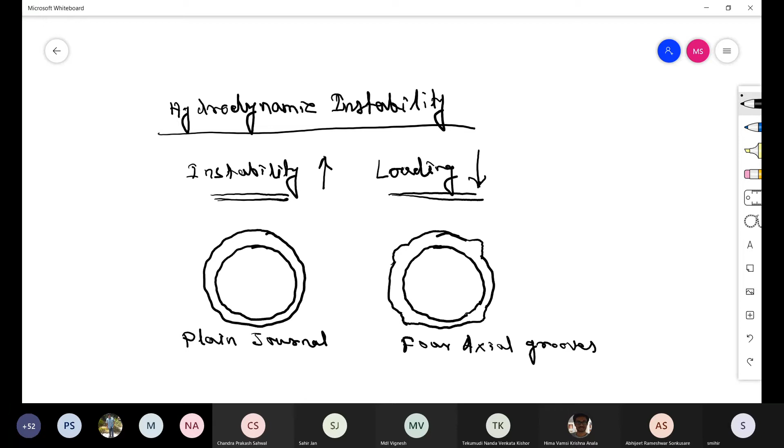This is your plain journal bearing. This is 4 axial grooves. These grooves are in axial direction. Like this is the bearing. So these grooves are in the axial direction. This is the groove. So by that you can actually feed oil and load the bearing.

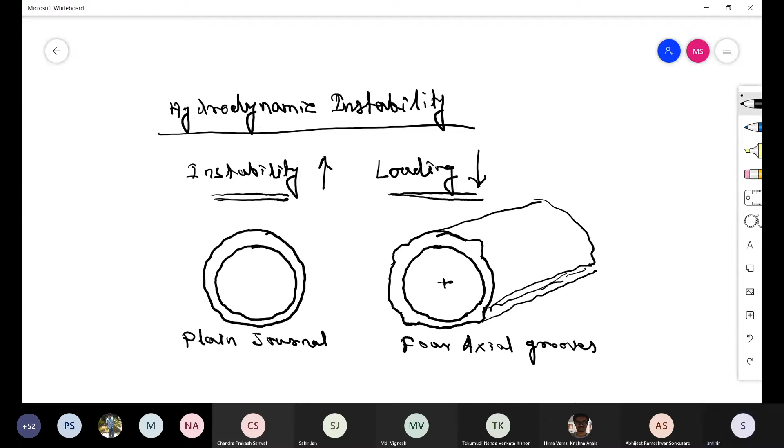So your ultimate aim is to load this journal. Also you can have configuration like elliptical bearing. In this elliptical bearing, as you have a converging section here, you can see on the top, there will be pressure development on the top, so this bearing will be loaded. This is called elliptical configuration.

Similarly, offset half bearings. So offset half, offsets are provided here, then you put your journal. By this also you can load the journal. So your ultimate aim is to load the journal.

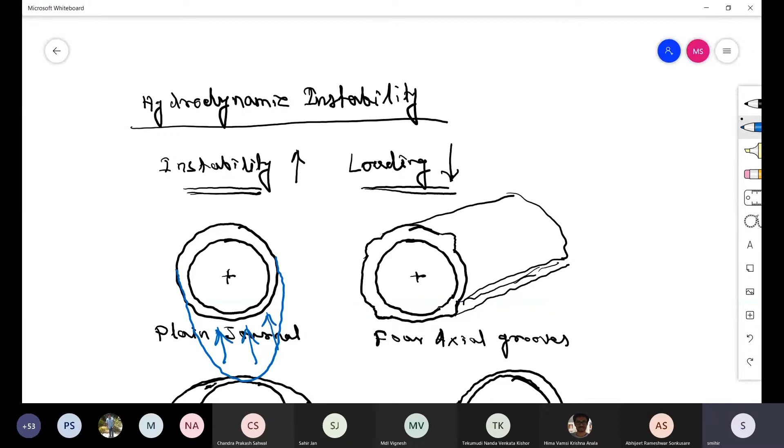In normal journal bearing, your pressure distribution is something like this. This is your pressure distribution. We don't want to get this pressure distribution. So you load it so that this pressure will be distributed.

Now the best configuration used widely in industries for journal bearing is tilting pad journal bearing. What is that? You have, this is the journal. This is called tilting pad journal bearing. You see, there are 4 pads here. The number of pads depends on the size of the bearing.

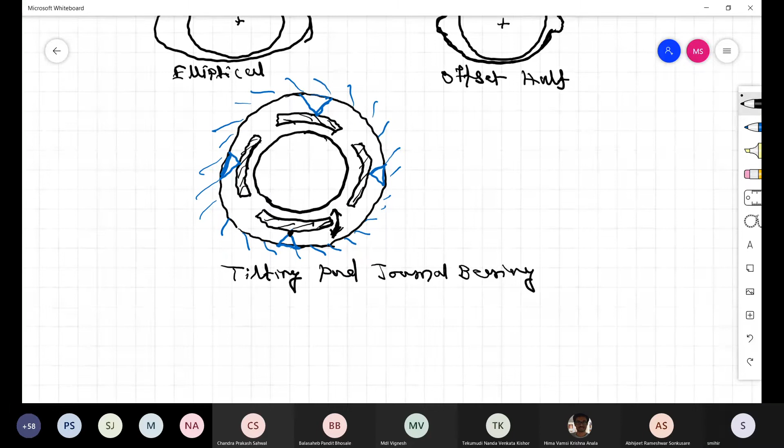Cause of hydrodynamic instability.

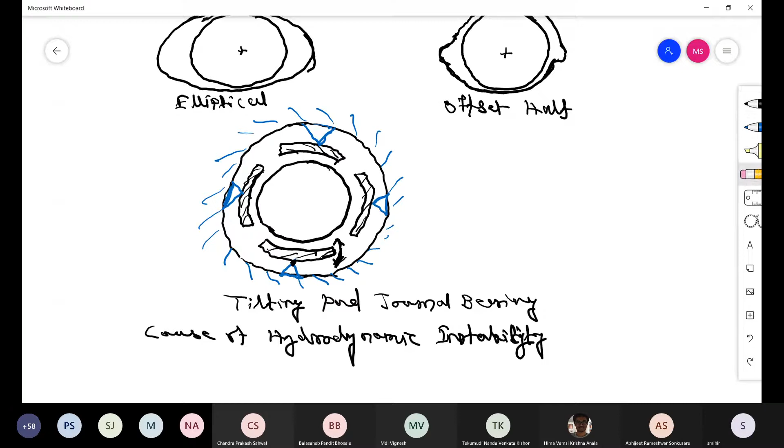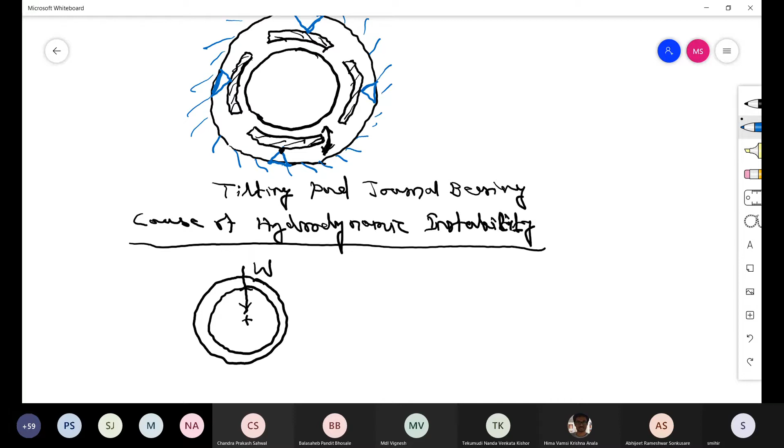Now, in a stable configuration, when the bearing operates, it operates like this. This is journal center. Now the external load is acting, that is W. So this external load, as I told you, this is balanced by the fluid pressure that we know now. This is balanced by the fluid pressure P. Because of P, you get the force F. So F stands for fluid force. So F equal to W. So it is balanced.

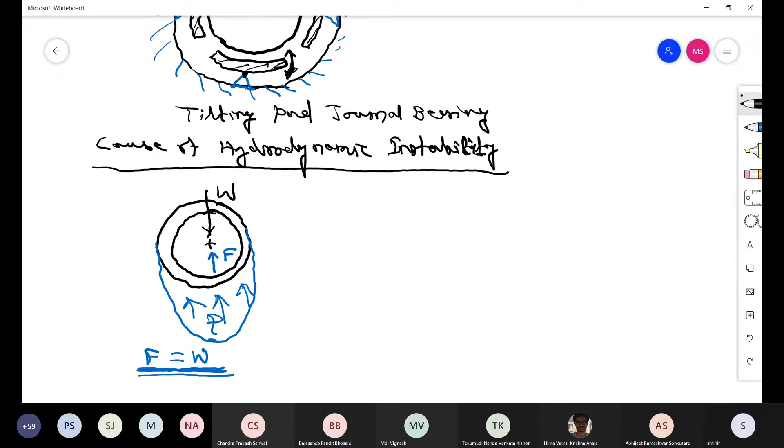Now what happens? You know, in operating speed, when journal rotates, then in ideal condition F equal to W, but all systems are expected to get little change in load. So this is your bearing and this is your journal.

So this one earlier was W, and this one was F. Now if you see, the bearing center is somewhere here. This is bearing center, this is journal center. Now F equal to W, it is balanced.

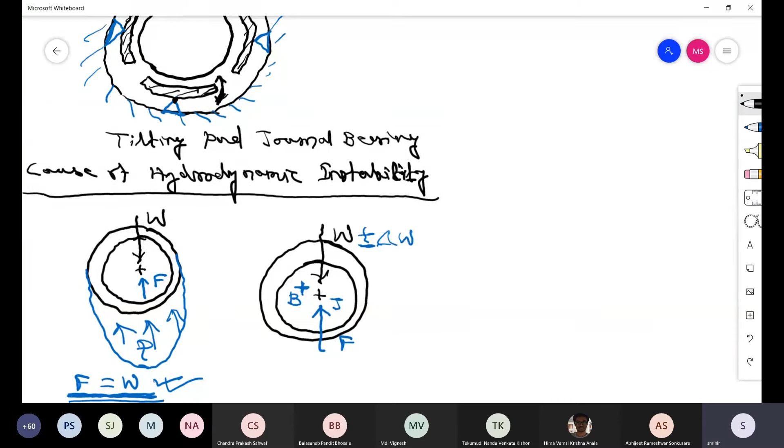Now because of some reason it vibrates, or this load W goes plus or minus delta W. Load may change, so load is not exactly W, it may be slightly plus or minus delta W. Imagine that at some point of time instantly now there is the load, let's say minus delta W, some amount.

Then what will happen? This F will be greater than W. W is now minus delta W, so it is greater than this at some point of time, because this force F is the fluid pressure due to fluid pressure.

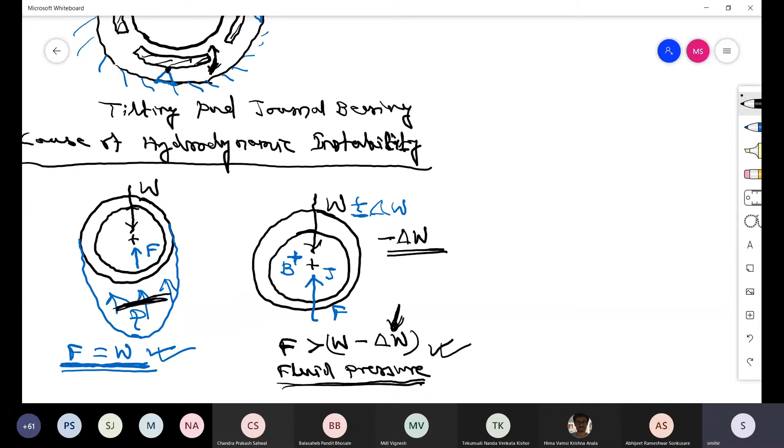So instantly you can change this delta W, but this fluid pressure takes some time to change. Now your load W reduces, that means ultimately this pressure will reduce to balance it. But at that instant the pressure is same P and it is same F. Now that means F is greater than W minus delta W.

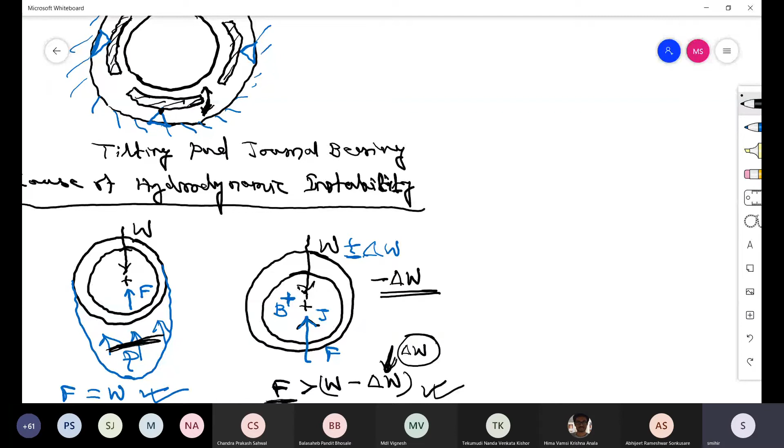So what will happen in that case? In that case, this force will push the journal upward. Now in the next instant, this delta W may change again. So in that case, this F is never equal to W. F is always trying to adjust W, but it takes some time because of fluid pressure.

So fluid pressure cannot change instantly. So ultimately what will happen? So once it starts, this is the journal center. So journal center will be disturbed and it will make a circle around or ellipse around bearing center.

So forget about the rotation of journal. This is the rotation of journal, which is omega. Journal is rotating with a speed of omega, this way. With a speed of omega it is rotating, and now the journal center is making a move around bearing center.

See this dotted line, this red. So that is also having some other speed. This is called omega p. So there are two speeds now. One is omega, which is the speed, our desired speed, at what speed we are running our turbine, generator, or gear assembly, or whatever machinery. That is the speed of journal.

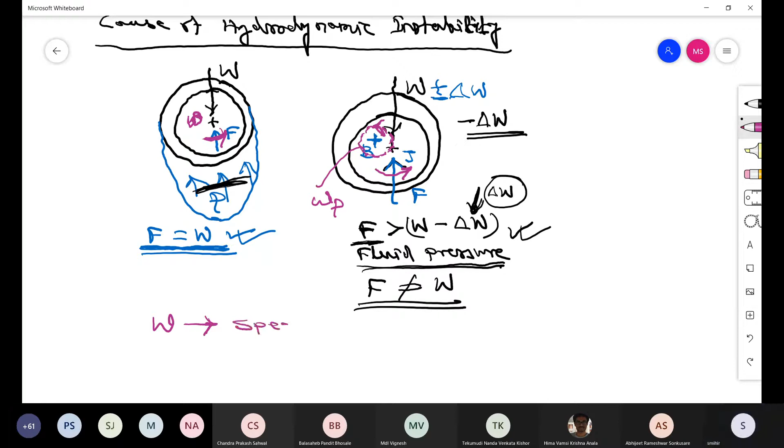So omega p is the speed of journal center about bearing center. Any doubt?

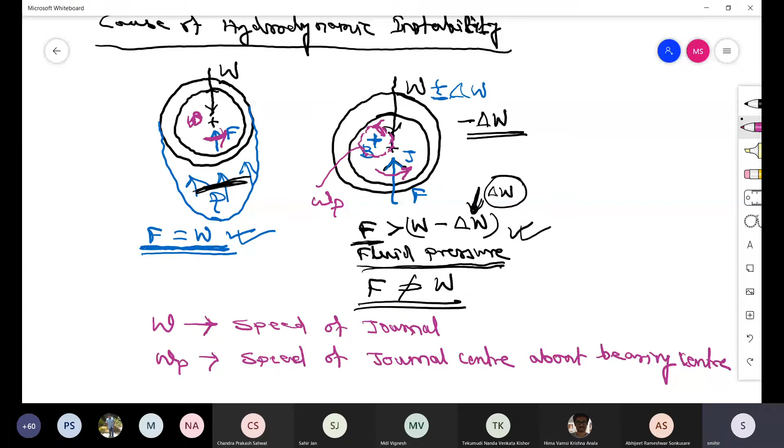Okay, so this omega, this fellow omega p, it is not in your control. So therefore you cannot actually remove it. So this is called whirling. Whirl, this is whirl speed. This is called whirling, this is known as whirling of the journal.

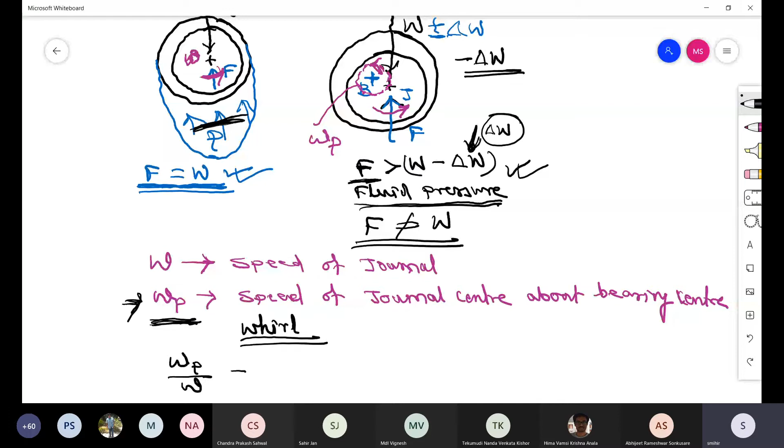So journal center will rotate about bearing center. So this whirling for hydrodynamic journal bearing, just remember this is omega P or omega P by omega equal to, or approximately equal to, 1 by 2, half. We'll see how it is half. So omega P by omega equal to half. So this is called half whirl mechanism.

Half whirl mechanism or instability. So imagine you run your journal with a speed of, let's say, 1000 rpm or 2000 rpm or 3000 rpm.

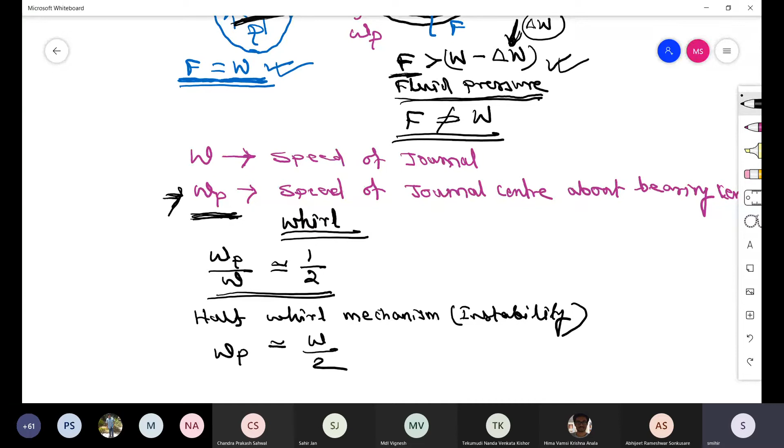Omega P will always exist. Omega P will be always there, and it will run at what speed? It will run at omega by 2, half of the speed of the journal. That is called spinning speed. Even this one you can call spinning speed of journal.

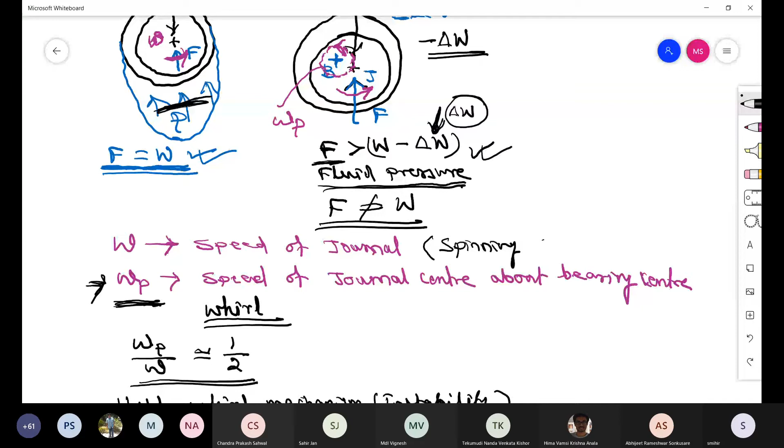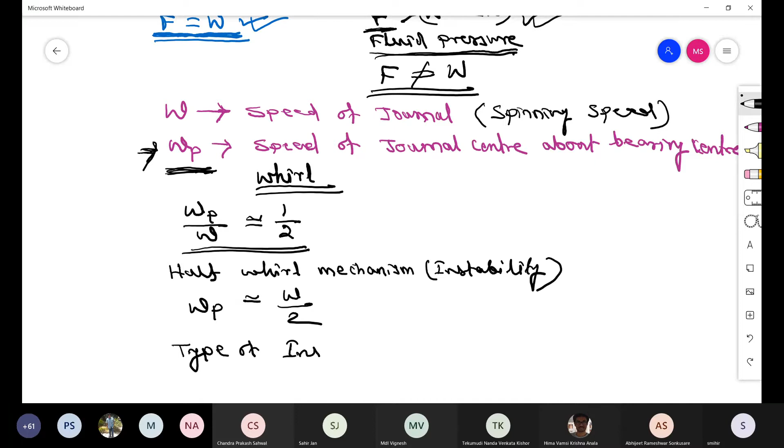So theoretically it is half of the speed. So now, type of instability. So first one is subsynchronous.

Subsynchronous. Yes, please. Sir, this ratio will remain same irrespective of the unbalanced load? Yeah, yes, it doesn't matter.

But this speed is not going to change. This omega P by omega ratio will remain same, whatever speed you take. And so when the pressure will actually balance the offset load, try to imagine - see, things are vibrating.

You know, like this is the ideal case, pen and paper, we are saying this is W, right? But when the things are operating in actual industry, this W never remains same. It always plus or minus delta W. Okay sir, okay, for that instant it will try to balance. When it goes to balance it, then at that point delta W will change to another value.

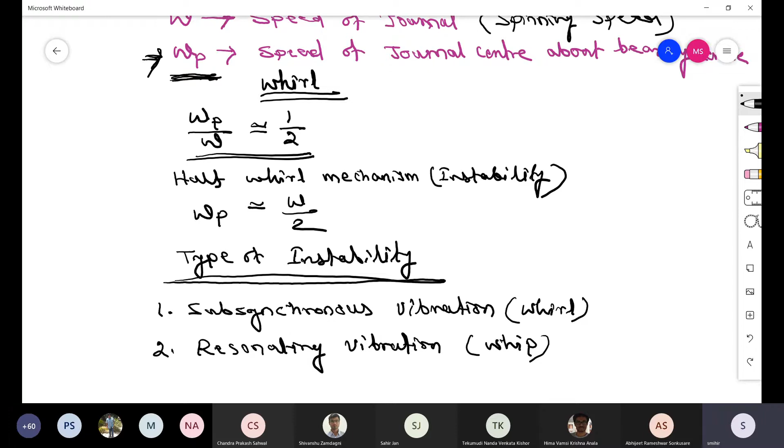See, in your vibration study, what do you do? mx double dot plus cx dot plus kx equal to f, right? How do you solve this equation? Can anyone tell me how you solve this equation?

So we find the homogeneous part, the general solution and particular solution, and add it. This way also you do: you assume f equal to capital F e to the power i omega t, right? And X you assume actually capital X e to the power i omega t. Is that correct? Yes, sir. Okay, so now this is called synchronous.

Can anyone tell me why synchronous? They are in phase, so they will have the same frequency. They are having the same vibrating frequency. You are assuming — see, try to understand, it is not that actually happening. You are assuming the vibration is synchronous, first of all, in your mind.

And then you are putting a forcing function. This forcing function you are putting with omega, and the same you are putting for response. So when response and the forcing — input and output — input is your forcing function, output is your response, now both are having the same frequency. So then it is called synchronous vibration.

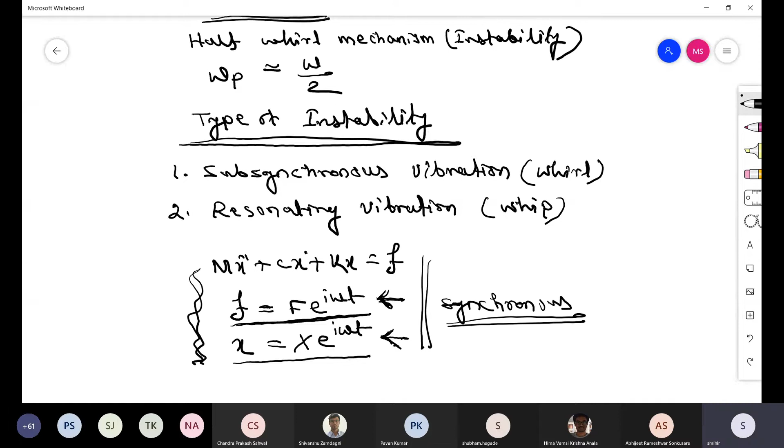Now coming here, I mentioned two things: one is subsynchronous, one is resonating. Now in the subsynchronous, that is actually omega p.

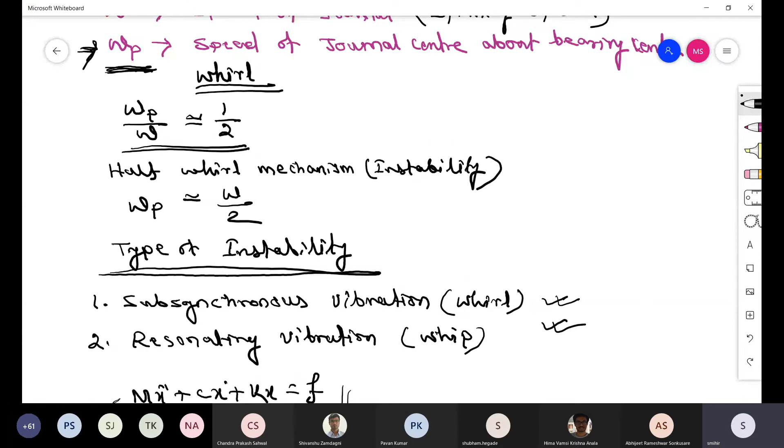See, in our system, in the journal bearing, who is actually giving this vibration? This omega p. If omega p is not there, imagine — the journal will not be disturbed. It will remain the same at that point and it will just rotate. So there will be no vibration at all. If you imagine there is no omega p, or no amplitude involved with omega p, then there is no vibration at all for the journal bearing.

The journal will remain the same at that point, it will just go on rotating. So rotating will not give you any vibration here. But because of omega p, the journal is vibrating — journal is going upward this way. So ultimately it will fail when the amplitude of this omega p becomes very high.

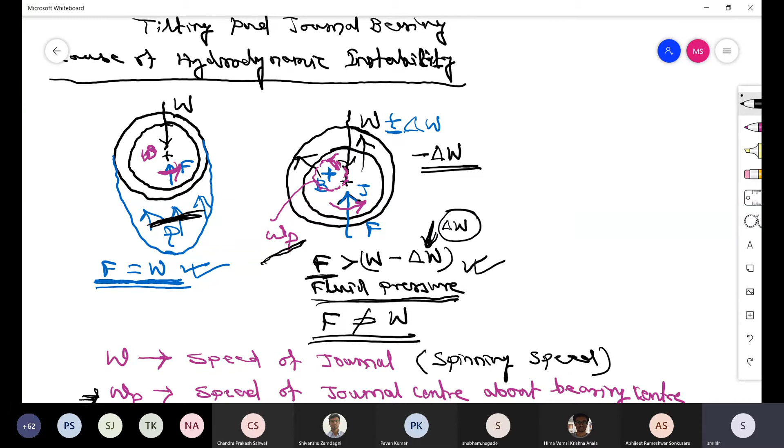At that point, what will happen? This journal will touch the bearing surface. If the journal touches the bearing surface, then the system will fail — it will rub and the system will fail. So now this omega p, as you can see here, for our case, we told that omega p is half the whirl mechanism, which is half of the speed of the journal.

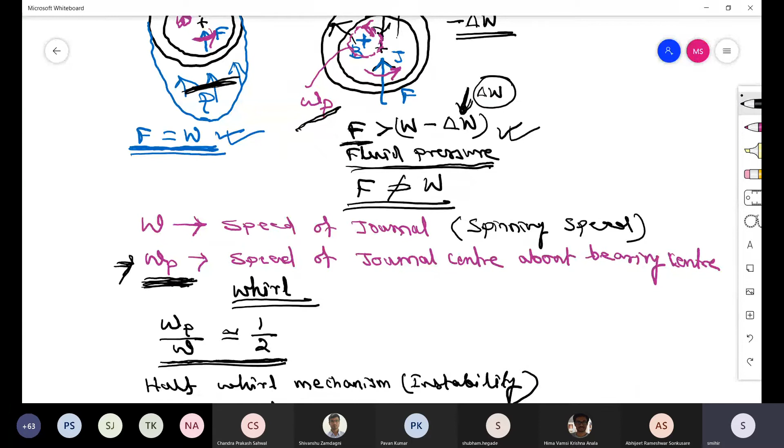Okay, so therefore it is called subsynchronous vibration. Now what about resonating vibration? Your friend was asking — resonating vibration. Yes, they both are equal, I guess.

Yeah, when the vibration — see, you go on increasing this omega. The system will be having some natural frequencies: omega 1, omega 2, omega 3. When it matches this omega 1, then the system may fail. So that is your resonating vibration.

But in our rotor-dynamic case, things are completely different. We'll see now the case. Okay, let me delete it, then we can move ahead.

Okay, let me draw. So this side we will draw whirling speed, whirl speed, which is omega p. Now this side will go for speed of journal, omega.

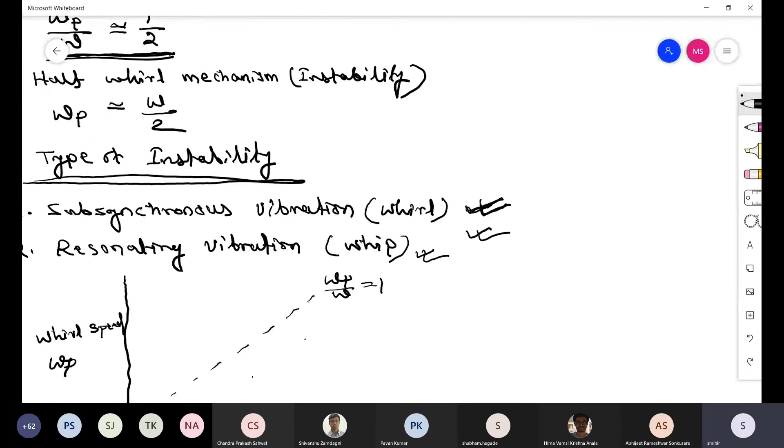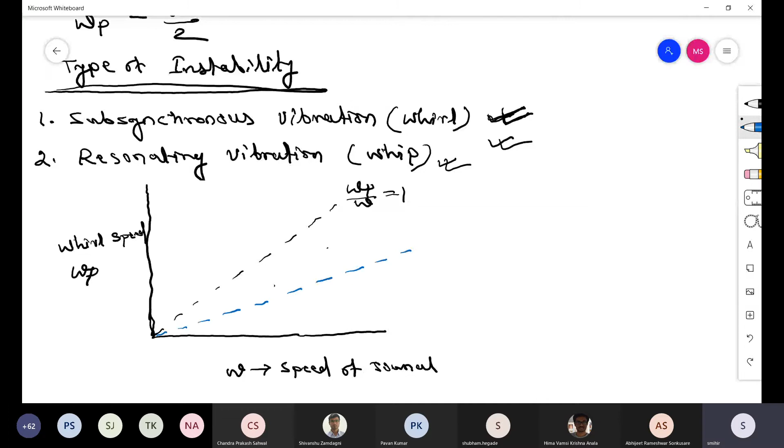This will follow this line. This is omega p by omega equal to half.

Now in this line, let us plot the vibration. If at all there is vibration, so in this line, let us first mark that a system will be having natural frequencies. Let's say our first natural frequency is here, omega 1. Second natural frequency is here, omega 2. Third natural frequency is here, omega 3. These are omega 1, omega 2, omega 3, natural frequencies.

Now you go on increasing speed of the journal. So when you increase your speed, now if you see omega p has to be half. So vibration will come as per omega p. Depending on omega p, you will get vibration response. So it will vibrate like this as you increase the speed. So this vibration amplitude is like this.

This is almost stable. Now what will happen at omega 1 when we increase the speed? Can anyone tell me? So there should be 2 omega 1, right? Like at 2 omega 1. Yes, very good. So this is omega 1 value.

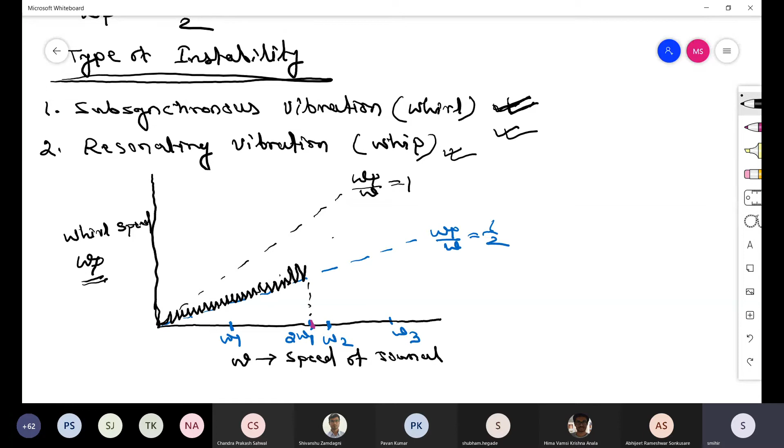Now you go on increasing, the vibration response will be very small. Now go on increasing, vibration response will be small and slowly it will increase, and at omega 1, twice of omega 1, here at this point, this vibration response will be very high. Clear? Because at this point what is happening, you are actually touching at this point. If you take it here, you are touching actually omega 1.

So when your system reaches a speed of 2 omega 1, or your journal, system means your journal is rotating, when your journal reaches a speed of 2 omega 1, then system will vibrate with a very high response and system will fail.

So you do one thing, again you increase the speed beyond 2 omega 1. So what do you expect if I increase the speed beyond 2 omega 1? So vibration will settle down.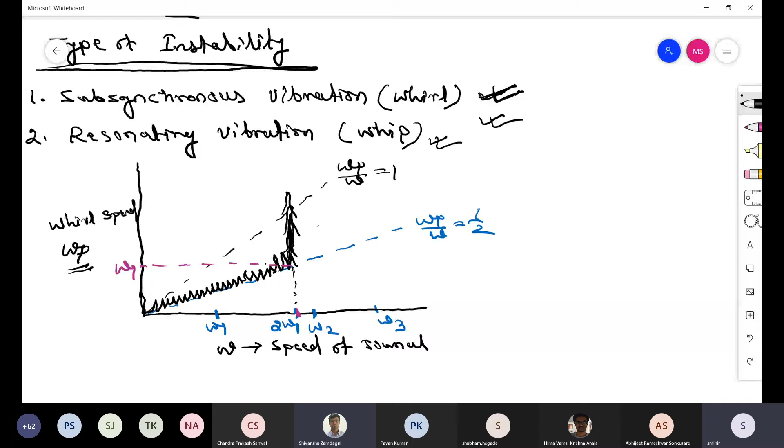No, it is not the case for journal bearing. It is interesting in case of journal bearing. Try to understand that up to 2 omega 1, when omega p reaches, omega p is equal to omega 1. That means omega equal to 2 omega 1. At this point you will get this vibration.

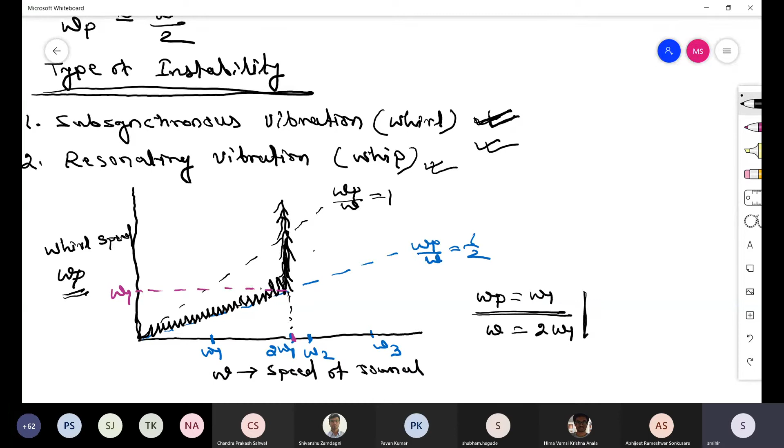This is called your second type. Now the vibration from here to here, this is called your subsynchronous vibration. Clear? Now from here to here, this is called resonating vibration. Here to here means this, at this point only. This is called resonating vibration.

Now you increase the speed further beyond this point. So but your omega p will stick to omega 1. It will no more follow this, no more follow half. So that means if you are increasing your speed, let us say beyond 2 omega 1, but omega p will remain always with omega 1. Okay, so therefore this is called resonating vibration.

That means you have no choice of increasing the speed further or beyond 2 omega 1. If you increase the speed beyond 2 omega 1, then omega p divided by omega will not be half. Omega p will be equal to omega 1 always beyond this point. Okay, so this is called whip. This is called whip.

This is a very typical to journal bearing. This is called whip and this is called whirl. So whip will be always with omega 1, whatever speed you increase further beyond this line. Any doubt, anything you want to ask here?

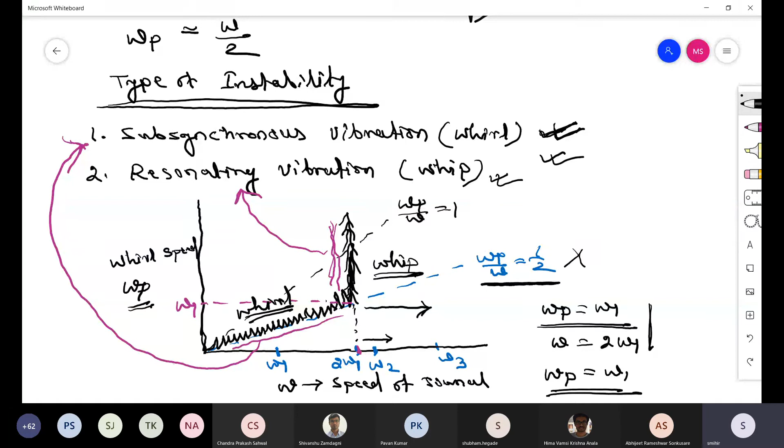So that means it is not following this rule that omega p by omega equal to half beyond your 2 omega 1 speed. It will always follow beyond 2 omega 1, omega p equal to omega 1. It is static, so omega p will not change further. It will remain static. So therefore, this 2 omega 1 is called threshold speed of journal bearing.

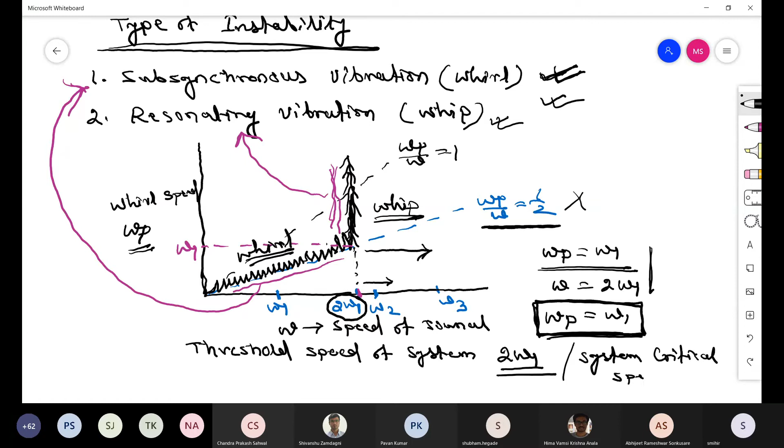Okay, or you can say it system critical speed. So you can run your journal in reality up to, let's say, 0.8 of this omega s. Omega s is your threshold speed, 0.8, 0.85. Because as you know, when you go close to resonating speed, then your vibration slowly increases. So to avoid that, most people run the journal bearing up to maximum 0.8 of this threshold speed.

Now this is not true for ball bearings. For ball bearings, you go on increasing, there is no subsynchronous vibration. So it will increase, the speed and the vibration will increase as per the speed. But for journal bearing, it will follow up to omega p upon omega equal to half. Beyond that, omega p will stick to omega 1.

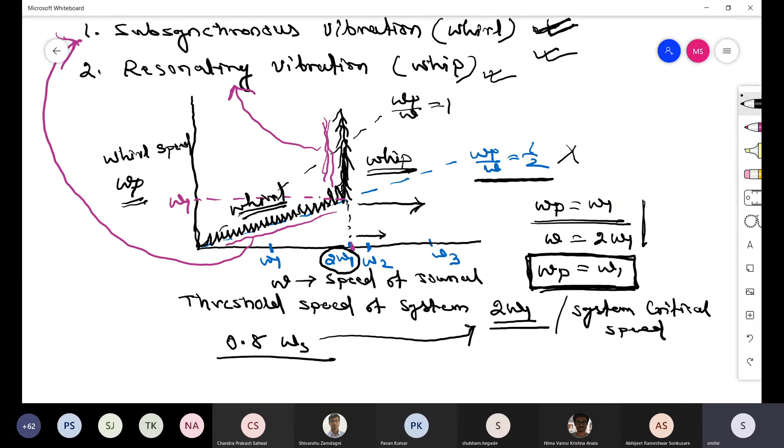Any doubt so far? Okay, now typically there are two types of vibration when you see the configuration of journal bearing.

Sir, so this omega 1 is the angular velocity corresponding to the first natural frequency of the system, right? Yes. Sir, in that case, usually when the systems are very heavy, the natural frequencies are very less, so the omega corresponding to it will be also very less. Yeah, so you have to design your system such that the ultimate aim is to increase this threshold speed. So sir, that means you have to design your system such that you have a high omega 1 value. So then you can run your system. It all depends on what RPM or what angular frequency you want to run the journal, so based on that, journal bearings are designed.

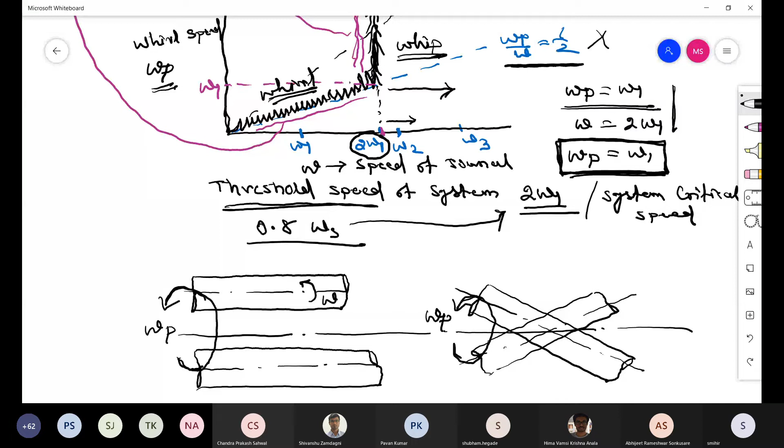Okay, try to understand here. There are two types of whirling possible, subsynchronous whirl. Two types possible: one is translatory, one is conical. This will happen when L by D ratio is small, narrow bearings, and this will happen if L by D ratio is large. If L by D ratio is large, it may vibrate like this also, this conical mode of vibration. For small L by D ratio, there will be no conical mode of vibration, it will be completely translatory type.

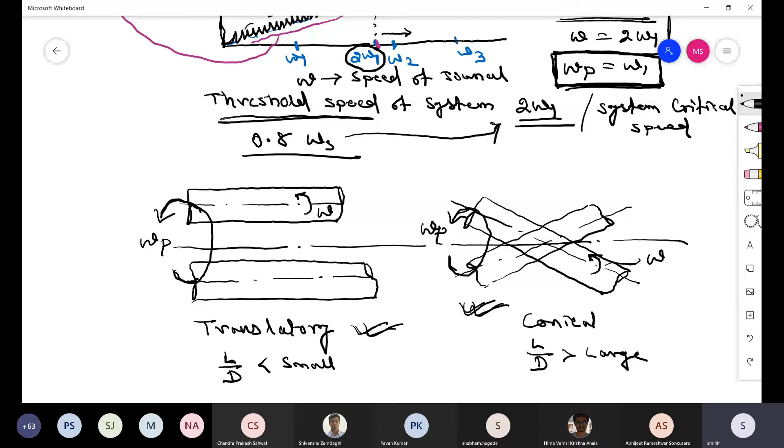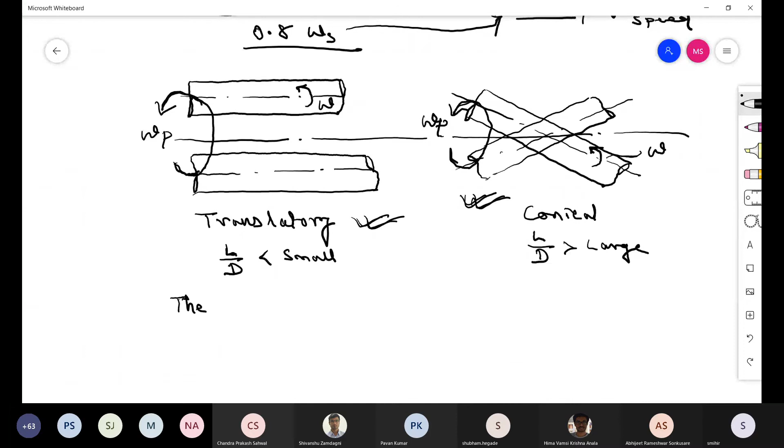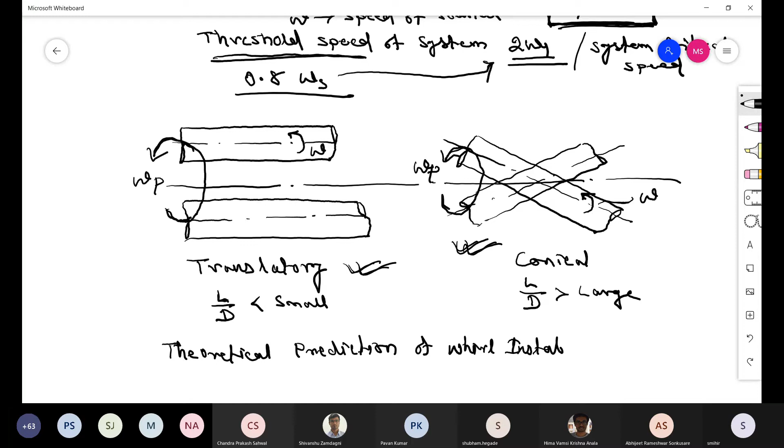Now let us predict this half whirl mechanism. Theoretical prediction of whirl instability.

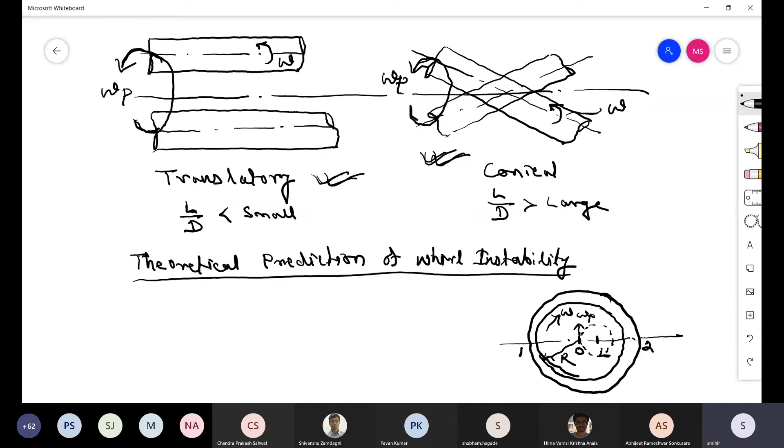This is journal center O, and this is bearing center on the right side. Now let's say the journal is rotating this way with omega, and the journal center is making a move omega p, rotating like this about the bearing center. This is the radius of journal R. This point is 1 and this point is 2. And of course, this is eccentricity, journal center to bearing center, that is eccentricity E.

Now imagine flow in the gap 1-O is R omega by 2 times C minus E. C is the bearing clearance, so R plus C equals radius of bearing. This is your gap, C minus E, multiplied by the average velocity of the flow, R omega by 2. Similarly, flow in the gap 2-O: this is the gap, so flow in gap 2-O is R omega by 2 times C plus E.

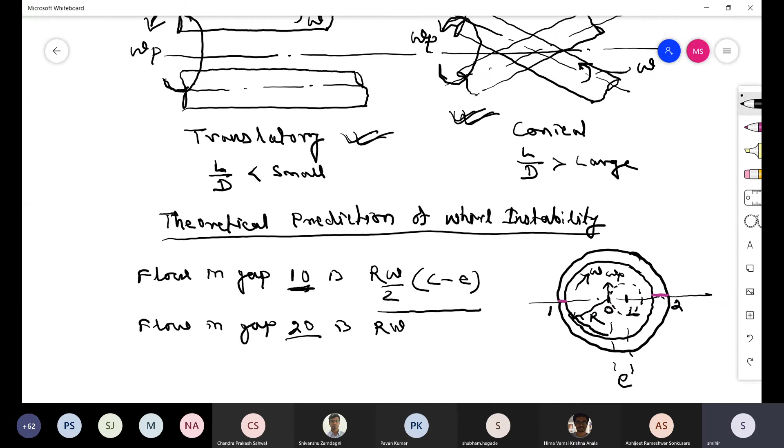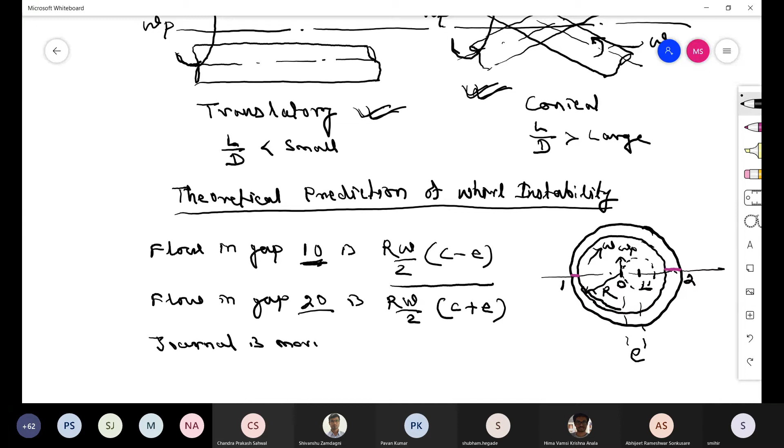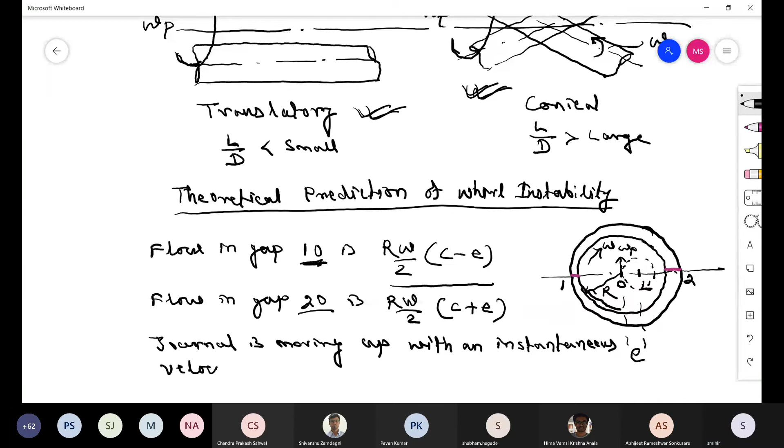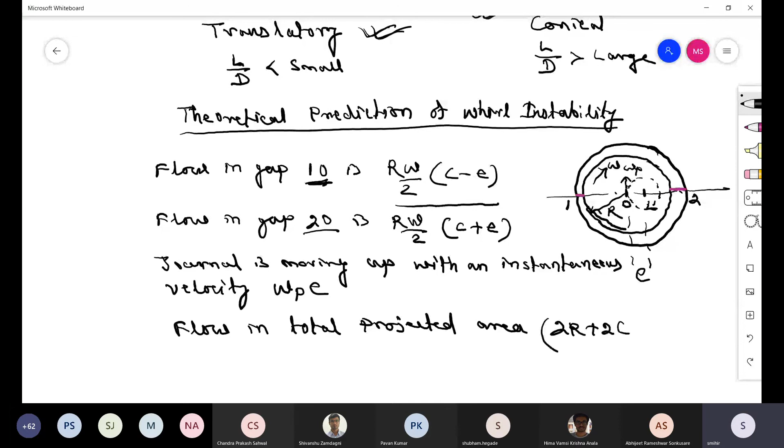So now at this instant, the journal is moving upward with an instantaneous velocity of omega p into E. So if you use that, the flow in total gap, flow in total projected area, that is 2R plus 2C, this is the total projected area. So what you get is R omega by 2 times C minus E, plus 2R omega p into E, minus R omega by 2 times C plus E, equal to 0.

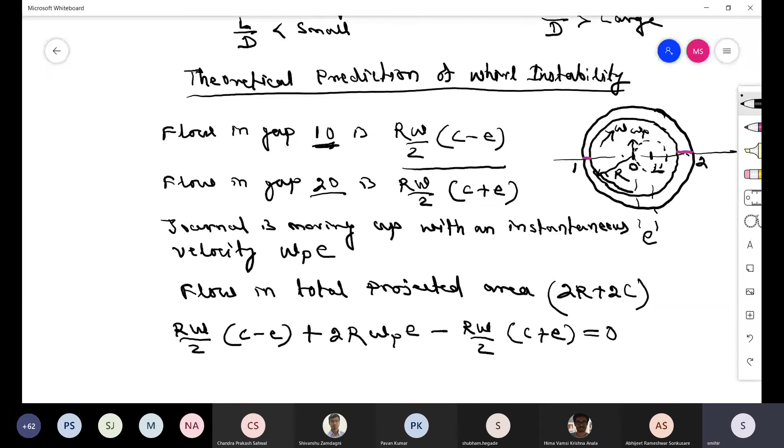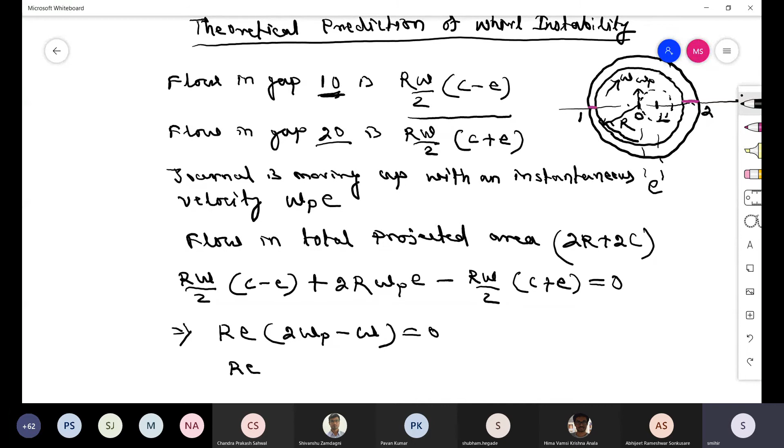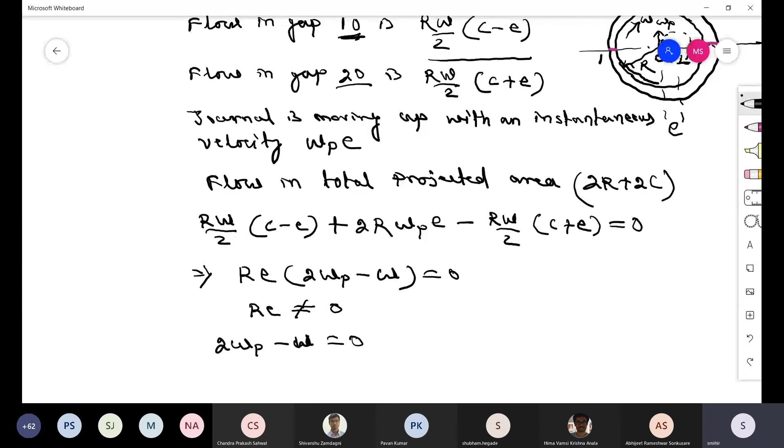Okay, so balancing the flow to 0, from here you get R E times 2 omega p minus omega equal to 0. As you know, this RE cannot be equal to 0, these are geometry. So in that case, 2 omega p minus omega equals 0, which implies that omega p by omega equals half. So this is the way it is derived from the flow balancing, so theoretically it becomes half, that's why we call it half whirl instability. Any doubt regarding this?

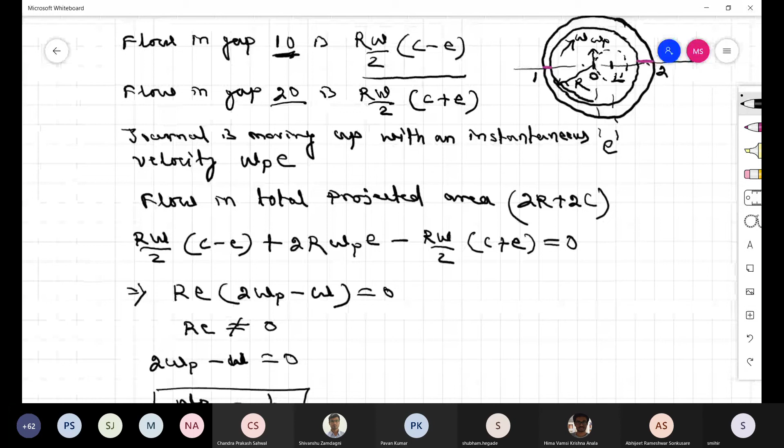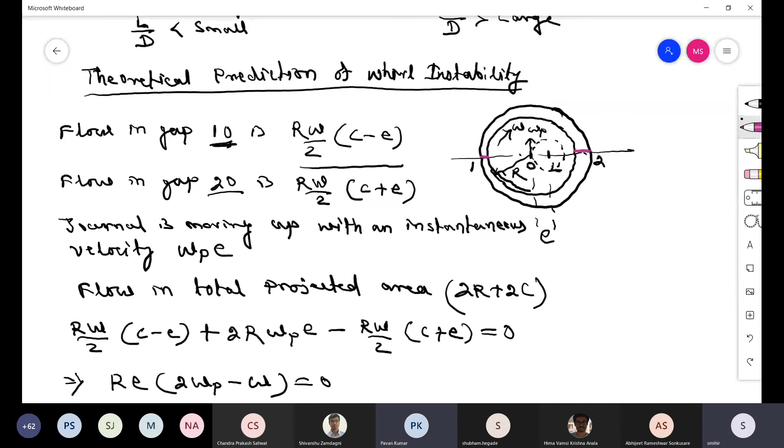Sir, can you explain the projected area, the flow and projected area? See, this flow, this gap - I told you that 1O gap means the gap between bearing and journal at point 1, this one.

Similarly, 2O gap means the gap in the area from the bearing to journal here.

So in 1O, what is your average speed? Average speed is always average speed of journal. So journal speed is equal to omega. R into omega is the linear speed of journal surface. Bearing is stationary, so average speed of flow is U by 2, that is R omega by 2. Okay, that speed into... just a minute.

So that average speed into the gap is C minus E. This gap is C minus E, this gap. Similarly at 2O, the average speed is same, R omega by 2, and the gap is C plus E. C plus E is here. This is C plus E.

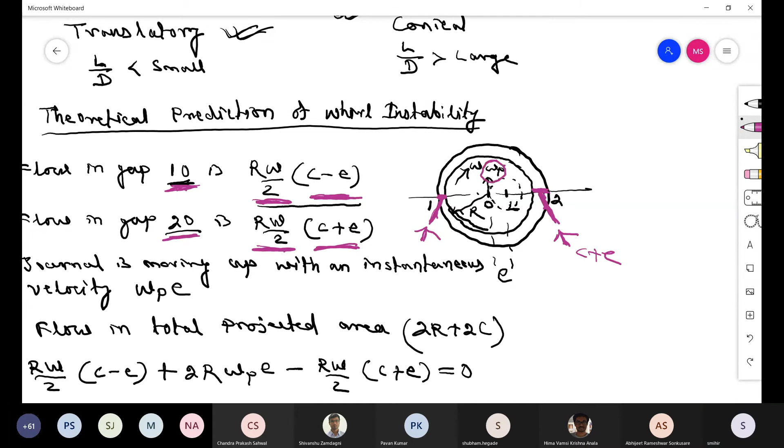Okay, now this is the flow happening in the gap. Now at the same time, the whole journal, that is 2R, is moving upward with a velocity omega p. So therefore the linear velocity of journal at that instant is omega p into E. That's why we have 2R omega p into E, that is the linear velocity of journal.

It is moving upward. This is also moving upward, this is also moving upward, and this is moving downward. This is moving downward. That's why it is minus.

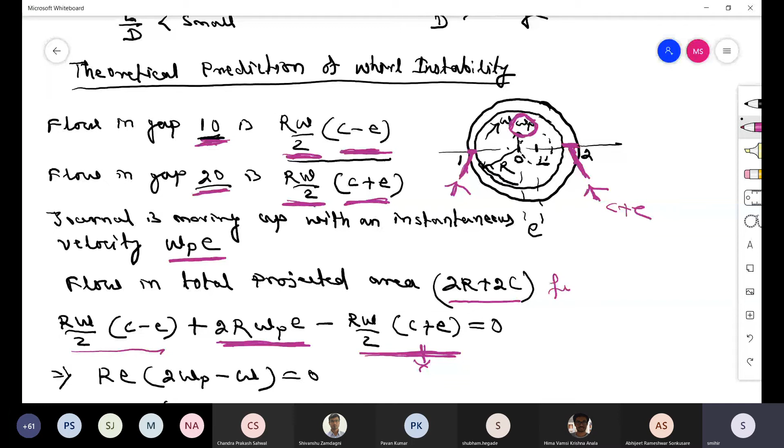So this is the flow in the total projected area 2R plus 2C, that means in the diameter of the bearing. Total bearing diameter from 1 to 2. This is actually from, if you see, 1 to 2.

So if you balance that, then you'll get this equation. From here you calculate omega p by omega equal to half. Is it clear? Yes, sir.

So this is what we got from theoretical prediction, but in numerical analysis we will see that this value will come around 0.35 to 0.4, not half, from numerical analysis.

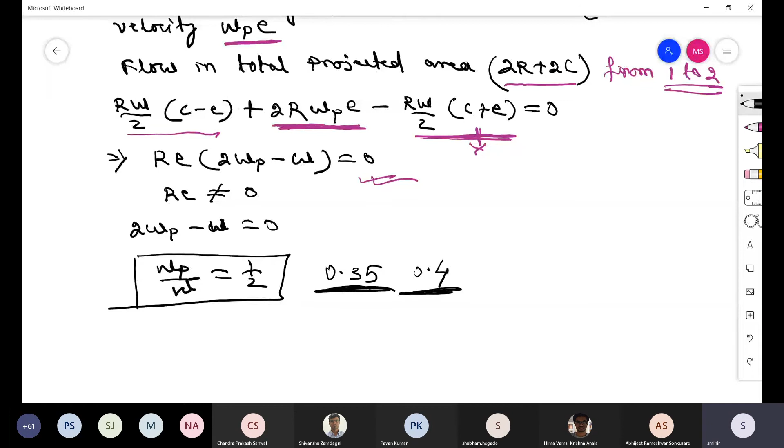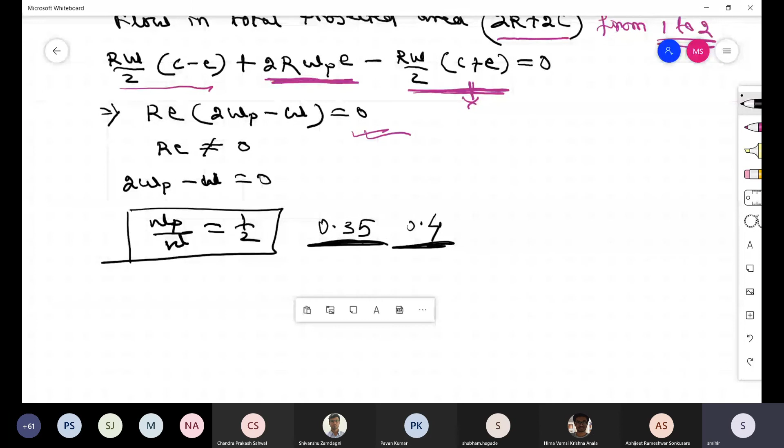Anyway, so let us now slowly move on to numerical rotor dynamics. We'll not be studying theoretical or analytical, but you have to do some assignment on that. But before moving on, let us say this vibration equation.

So can you solve this equation using Simulink? Simulink is available in MATLAB. Have you tried that? Any of you tried that?

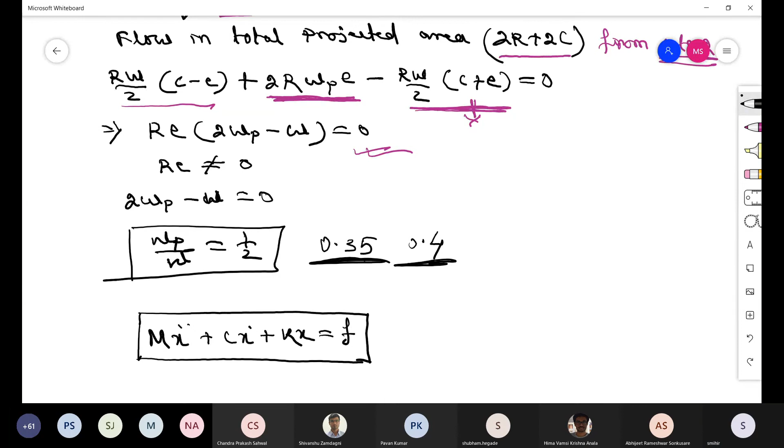Anyone tried Simulink in MATLAB? Yes, sir. Yes, sir. Yes, sir.

Okay, those who have not tried, or even if you have tried, so what I asked you to do is solve this equation using Simulink. So how do you solve this equation using Simulink? Using integrators, yes, using integrator. So you have to write this equation in this manner: x double dot plus c by m x dot plus k by m x equal to f by m, right?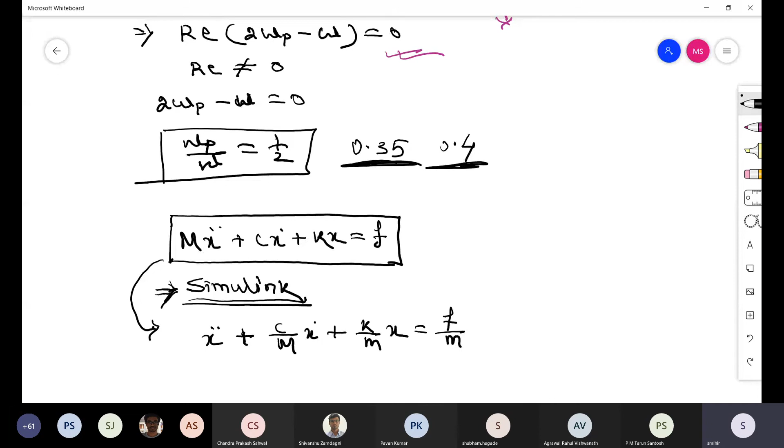So here, how do you do it? You put integrator, right? So two integrators you have to use, 1 by s. So this goes from this side, it comes x double dot, right? So this comes here x dot and this comes out x. So this you can actually plot. Go for a sink and plot it, right? So now you have to close this loop.

Now if you see the x double dot, what you are doing in x double dot? So this equation, if you see, let me - so x double dot actually equal to minus of this, plus of this.

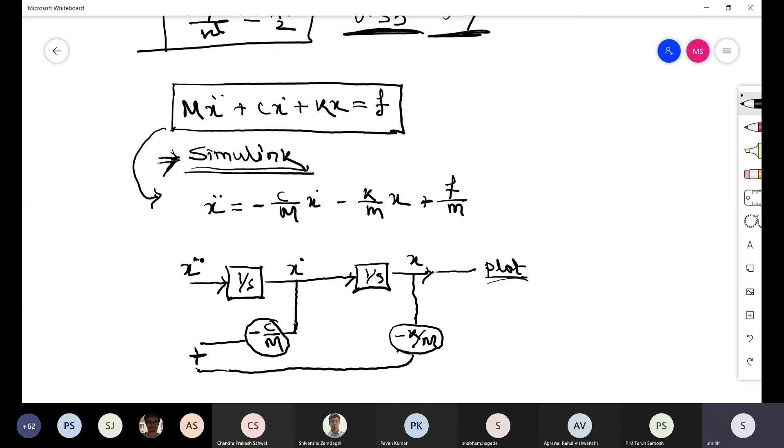So therefore, you take x dot from here, and multiply c by m. So this will become minus c by m x dot. And similarly, you take x from here, multiply minus k by m. After multiplication of this, you bring these two. Now combine these two, add these two. Then you feed that, and you also have to bring f.

If you give some constant here, f by m, you add everything here, and then feed it to x double dot. Clear? This is what you do in Simulink.

Everyone, I suggest you try this today. This is very interesting and it will not take much time. You have to also assign an initial value for this. Any of the integrators, you assign an initial value, for x or x dot. So by that you should be able to solve.

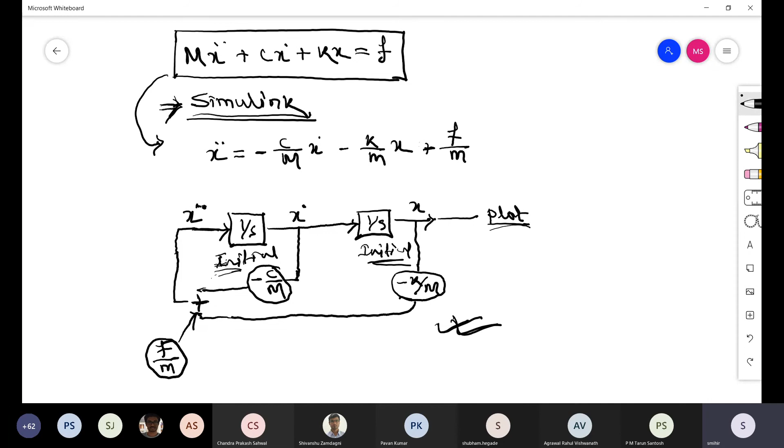What I suggest is you make this diagram in Simulink, then take c equal to 0, and also f equal to 0 for the first case. Second case, you take c equal to something, but f equal to 0. Third case, you take c equal to something and f equal to something also. See the response, how the plots are coming, see how x is varying.

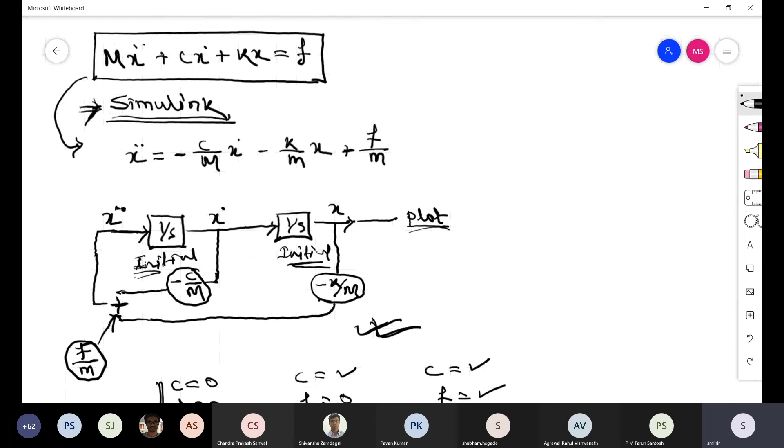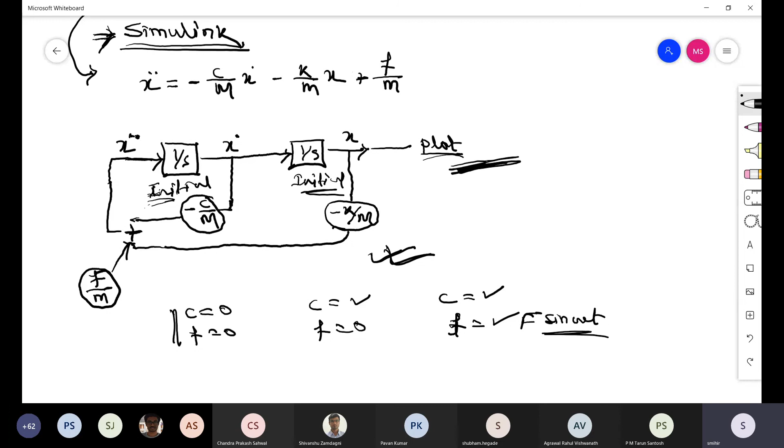For forced vibration, you can give F as a function of F sin omega t or something. So try that with Simulink today. If you have any doubt, next class we can discuss further on this. So that is all for today. Let me quickly know if you have any doubt.

Hello sir. Yes sir. In that FDM program for plain journal bearing, the first assignment, sir, if we increase the number of... You are talking about the first assignment, right? Yes, sir. First assignment. Sir, if we increase the number of nodes in that, the value of maximum pressure decreases very much.

Why so? No, it should not decrease that much. But what is the node number you are using? Sir, if we use node number around 100 or 200, there is not much variation. But if we increase beyond that, the value of pressure decreases drastically. But your total load remains same or different?

Just pressure, if we plot that pressure curve, no? I'm not talking about pressure, I'm talking about total load. See, this is mesh convergence. With 10 nodes, 50 nodes, 100 nodes, the result will vary, but beyond a point the result will not vary. Now you should always check the load, not the pressure. Pressure may shift a bit, but the load, which you get by integrating the pressure, W equal to integration of P, that load should remain the same.

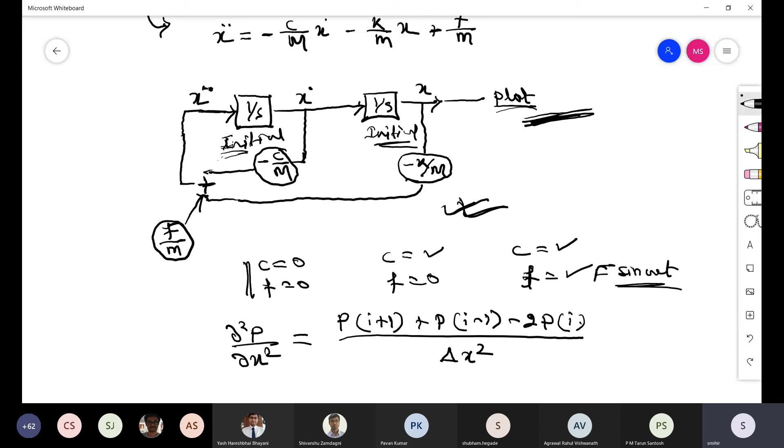Are you talking about this? Yes sir, yes sir, it is only due to that sign change we are seeing the change with delta x. This has to be plus, this is not minus. If I have written it, then it's wrong. Okay, by mistake I have written it. So this has to be plus.

Okay, so you rectify that, do the program, and by this Sunday I'll open the second assignment for journal bearing FDM. You have to complete that and upload the journal bearing FDM also. Then we will move on slowly to numerical rotordynamics, and there also you have to do some programs.

Sir, is it possible that we can correct it? We have submitted the assignment, corrected. Okay, I'll open it. I'll put both assignment 1 and assignment 2 to be submitted this Sunday. Both. Okay, sir. Okay.